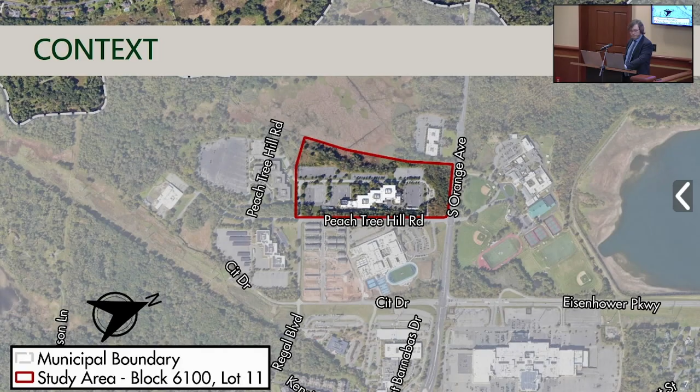To give an overview of the site, you see it in this inset as part of this map, highlighted in red. It's a generally rectilinear site with an office complex in the middle, consisting of 3 wings, surrounded by surface parking. It is 30.696 acres, which for context is just over half the size of the Livingston Mall site across the street. It is just one parcel, being block 6100, lot 11.

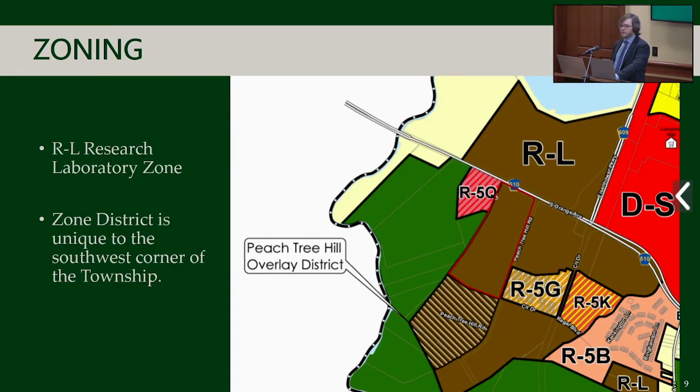It is designated as a 4A tax code, meaning it's commercial property, with the valuation just shy of $30 million. It is located within the RL Research Laboratory Zone. There is an RL2 zone in the northwest portion of the township. Otherwise, this zone is unique to the one you see on the map right now in the southwest portion of the township.

Regarding the statutory criteria relevant to tonight, there is the local redevelopment and housing law that specifies which of any 8 criteria the board may find for the site to be deemed an area in need of redevelopment. These cannot simply be recitations of those criteria as it relates to the site in question, but we must provide substantial evidence backed up by materials I mentioned previously, such as building inspections, prior municipal documentation, and a parcel-by-parcel analysis to substantiate the claims of criteria being eligible for designation.

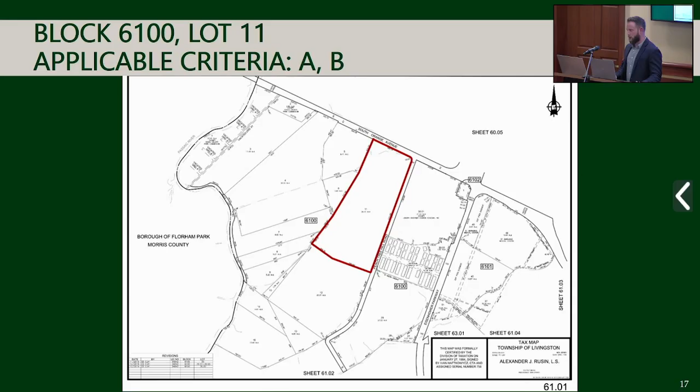So again, we're looking at one parcel here. It's lot 11 in block 6100, and we're going to go through why criteria A and criteria B are applicable. As Mark said earlier, he read through this, so I'm not going to read through it again. Under criteria A, generality of buildings are unsafe and dilapidated, and we're going to show you some pictures of the inside of this building to show the level of dilapidation and lack of safety.

Additional examples showing equipment just everywhere, creating obstacles, tripping hazards, and generally unsafe conditions in the general sense of the word unsafe.

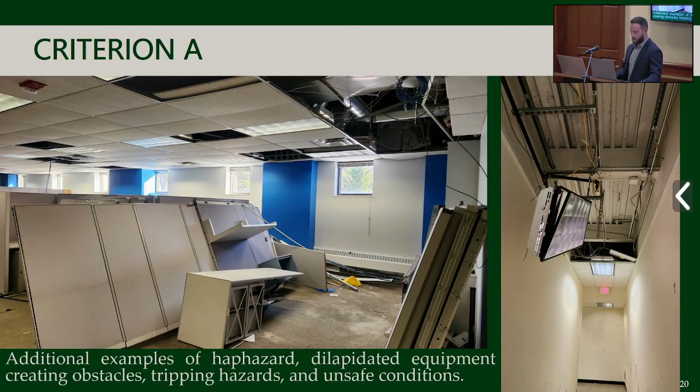Because of the specific use of the property, there was a super floor built over the primary masonry floor of the building. These pipes here were all used for cooling liquid to cool down the servers. That whole floor was removed, but the pipes are still in there.

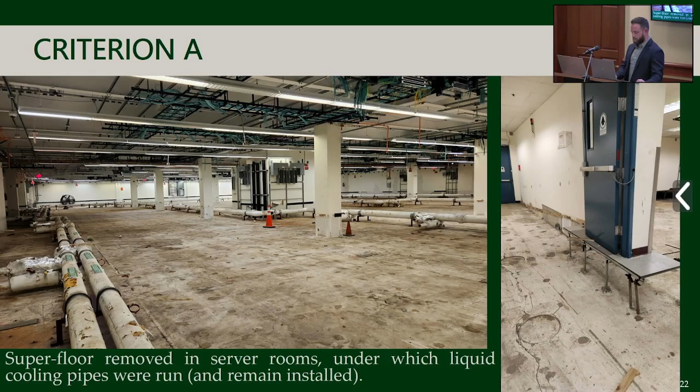You could see here how this door is like a floating doorway in the corner, where that super floor used to sit above the main floor of the building, carrying wires and pipes. This was very much a purpose-built building, basically all torn out, leaving behind only the things that were really difficult to remove.

Limited safety measures now exist in here. There's missing floor tiles, tripping hazards, and a door that you could walk into and fall down 18 inches.

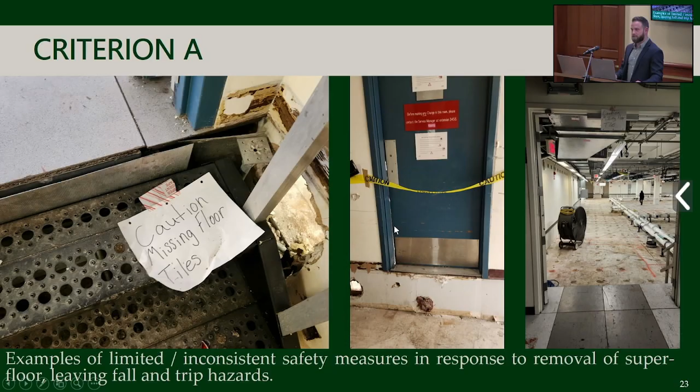Some additional things we observed: fire doors that were propped open by a janitor's mopping sign, and the sprinkler room alarm was going off basically the entire time during the site visit, and had to be manually shut off to stop making noise.

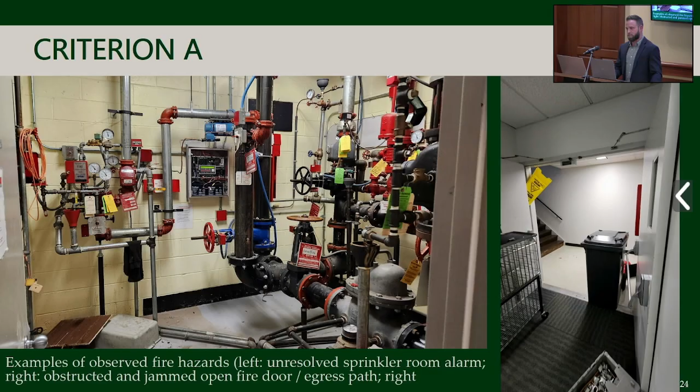So generally speaking, the generality of the buildings are at this point substandard, unsafe, and dilapidated. I think you could qualify this building under criteria A. This is pointing to some of the unsanitary images that were here as well.

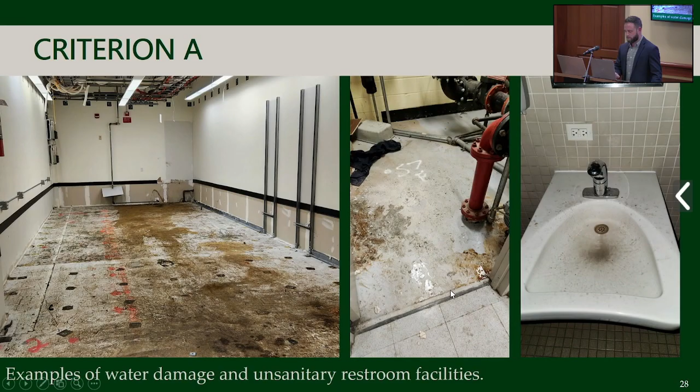Okay, so going to criteria B. As Mark stated, we're going to focus on the discontinuance of the use of a building that was previously used for either commercial or industrial purpose, however you want to characterize this. That's what the statute requires. If you read the syntax of this, the discontinuance of use is sort of enough on its own.

The abandonment is another part after a semicolon. The significant vacancies for 2 years is another semicolon, or the same being allowed to fall into such a state of great disrepair as to be untenable is another semicolon. So we're going with the stuff before the first semicolon: discontinuance of use of buildings previously used for this list of non-residential purposes.

Discontinuance in this case is evidenced by the lease that we were able to obtain, which was terminated in March of last year, and also by the physical removal of all the equipment that was unique to this use.

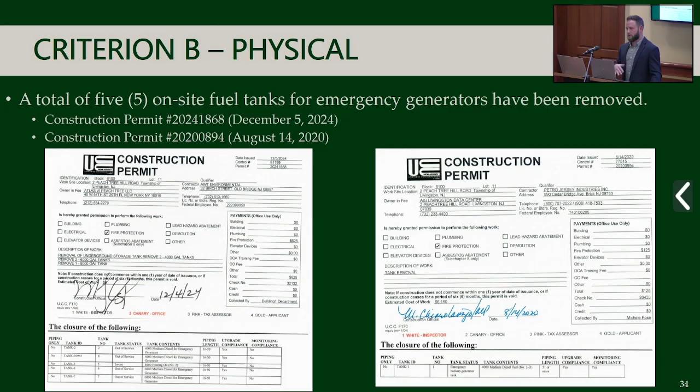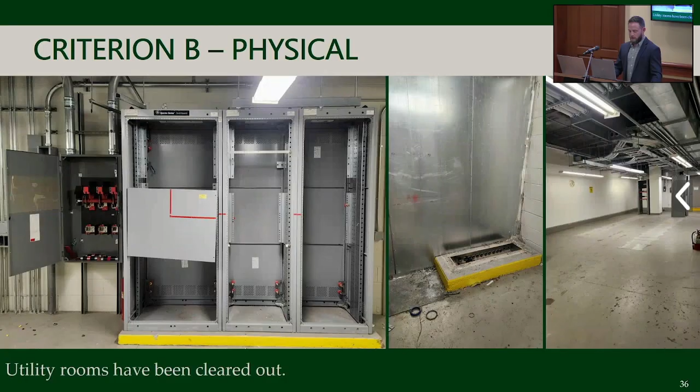There were emergency generator fuel tanks, five of them in total. In 2020 and in 2024, they were all removed from this site. Again, this was a physical requirement for a server-type use like this. All the cabinets were removed, the superfloor was removed. The tanks were below ground. All the utility rooms have essentially been cleared out.

So, discontinuance, for me as a planner, and in terms of the type of standard that I want to make sure we're meeting and finding here - this is not a vacant office building. This is a little bit more than a momentary pause in use. This is a true discontinuation of use. There's overt actions showing an intent to discontinue this use.

It's not really readily adaptable. Somebody couldn't come in with a coat of paint or even fix the drop ceiling. There's a lot that would have to be done to this building, AKA redevelopment, to adapt this for another type of use.

It was purpose-built. There's these expansive utility wings, a central operational control room, redundant electrical lines throughout the building. So again, major investment was made to make this into a data center server facility, and all of those things for the most part have been removed.

Thinking about this being used for another type of use, there's very large floor plates in here, there's very few windows. It would not be necessarily suitable for somebody to come in and just open up shop as an office in here. It's not really adequately parked for office use.